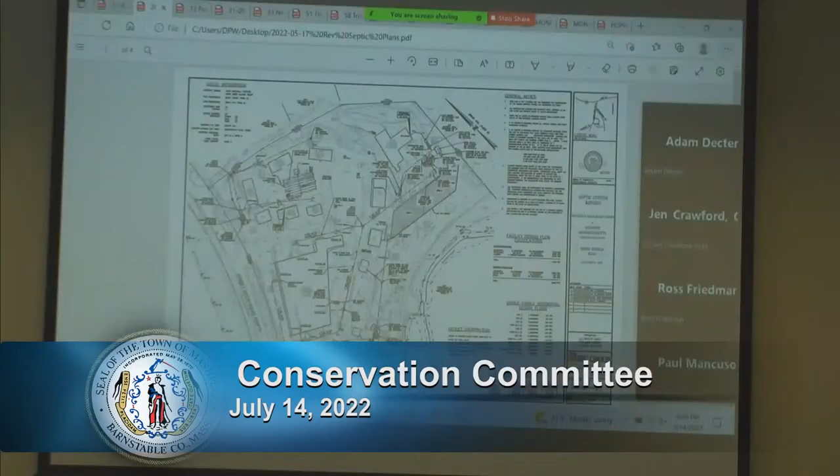The apartment complex is fairly old. The existing septic systems are starting to fail, and so as such we are proposing to improve the septic systems with some new IA systems that are nitrogen reducing, which will provide a betterment as far as what's leaving the systems and could reach nearby wetlands.

The wetlands on site include the Mashpee River behind the apartment complexes, with some BBW along the Mashpee River. Across the street, across Great Neck Road North, we have an abandoned bog system, which is flagged and shown on the left side of the screen.

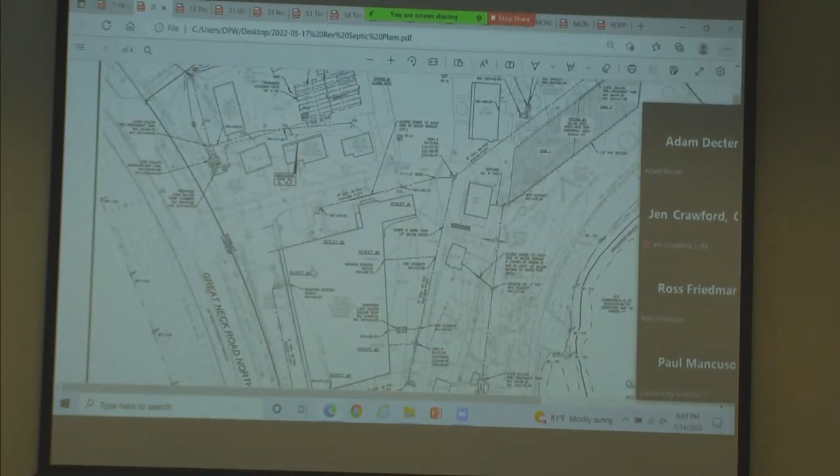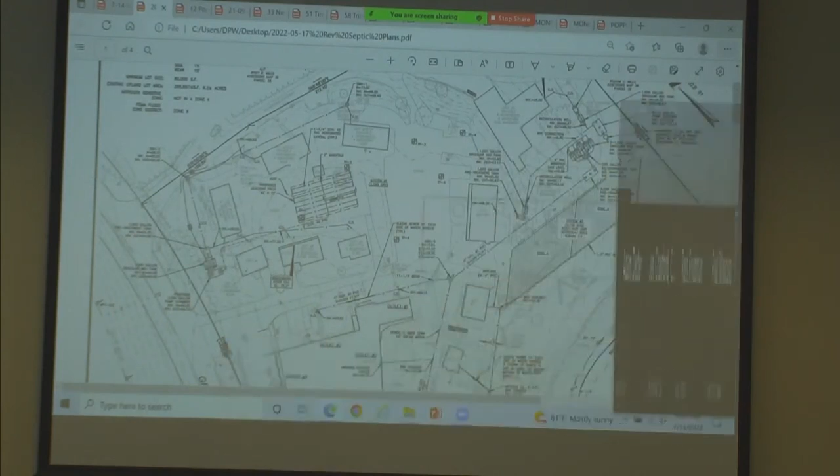They'll be abandoning the existing septic systems and installing new IA systems that are far more technologically advanced and nitrogen reducing, providing an overall betterment to the site since there will be less nitrogen leaving the system once these new systems are installed. So that's really all it is.

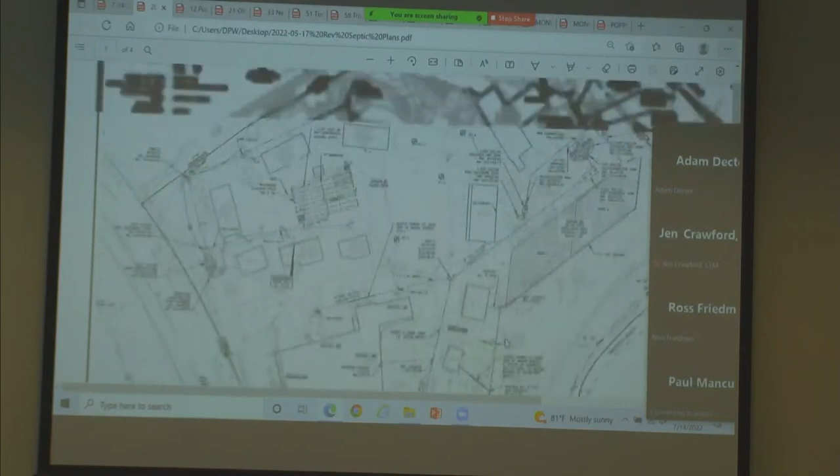There are a few different areas across the site where they will be installed. There were some constraints based on the existing structures regarding where these systems could be located, so we designed the project to have them as far from the resource areas as feasibly possible, since it's hard to fit these in with all the existing buildings on site.

One last comment: we have been approved by the Mashpee Board of Health for all the proposed septics, so we've already gone through their process and been approved. Now we're here proposing to you just to improve the existing septic systems on site, essentially. If anybody has any questions, myself or Todd McDonald would be happy to answer them.

Okay, thank you. I'm going to go to the commissioners first, if any of you have questions or comments, concerns for what you have before you. Why don't you take a couple of minutes to look that over.

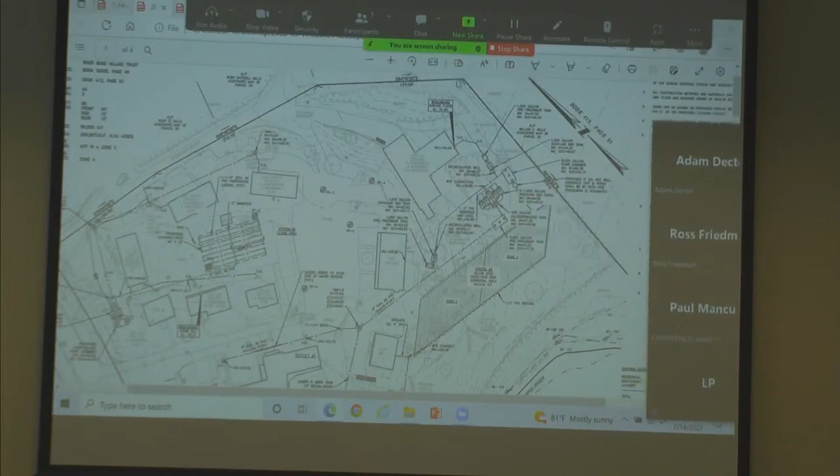I did hear that this is an IA system proposal. Is that correct? Yes, each of the three proposed systems are all IA systems. They are singular systems. Okay.

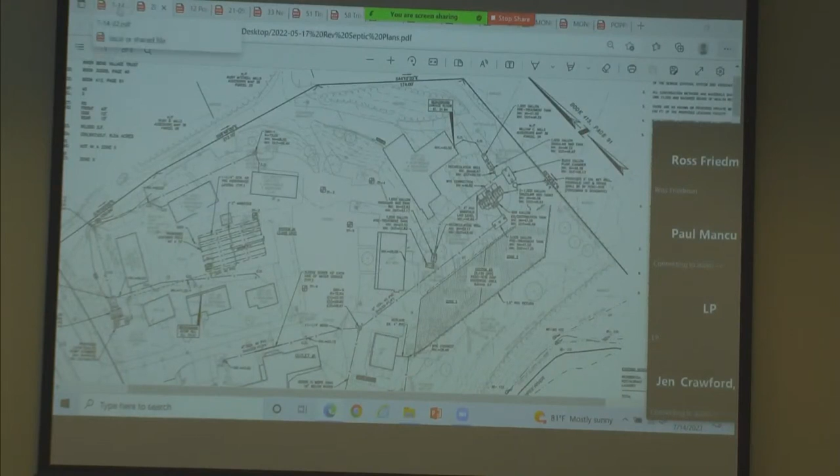And all of the cesspools are coming out, correct? Yes, all the existing cesspools are going to be removed in accordance with Title V. How many of those are there right now? There's a lot, because each of the individual cottages surrounding have their own systems. So there's a large number of systems on site, and we're compiling the whole site into 3 new proposed systems. I don't know the exact number of existing systems to be removed, but what I do know is each of the cottages have their own system.

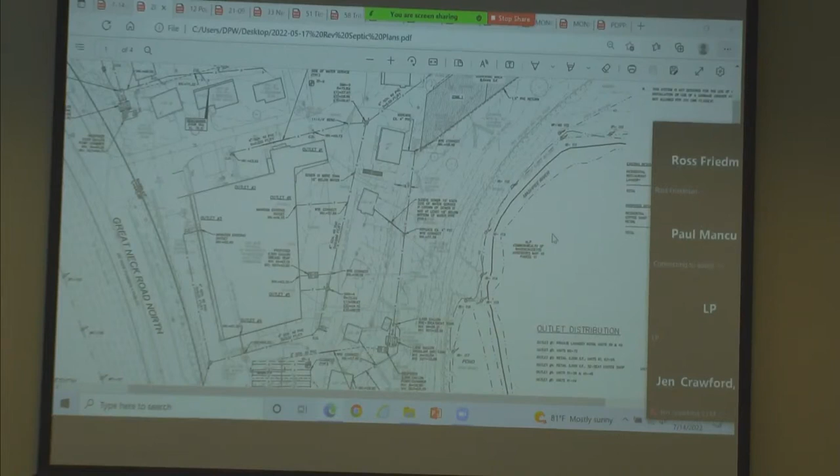Okay. Any other questions from the commissioners? Yes, Mr. Chairman. On the SAS on the south side of the property, what is the distance to the wetland across Great Neck Road North?

There's no dimension there to that wetland. And I'm seeing all the other systems are seemingly towards the center of the property, but this one's on the edge of the property and there's wetlands there. Do we have a figure for that distance?

Which system is that in reference to? System 2, the one highlighted on the screen? Yes. System 2 on the south side. Yeah, the 100-foot buffer to the inland bank runs right along the edge, so it's at 100 feet.

Do you see that? I see right along the property line... Oh okay, I see 100 foot. Okay, yeah, I see that now. Okay. A lot of information on this plan. There is a lot, yeah.

Mr. Chairman, did you mention how many— he said, when you asked a question about the septics, an unclear number, but how many cottages are there actually in the whole project that are to be undertaken? The number of units, how many units? He said there was one assigned to each unit, and I don't trust myself to count them. There's 10 cottage units, and then the one main building.

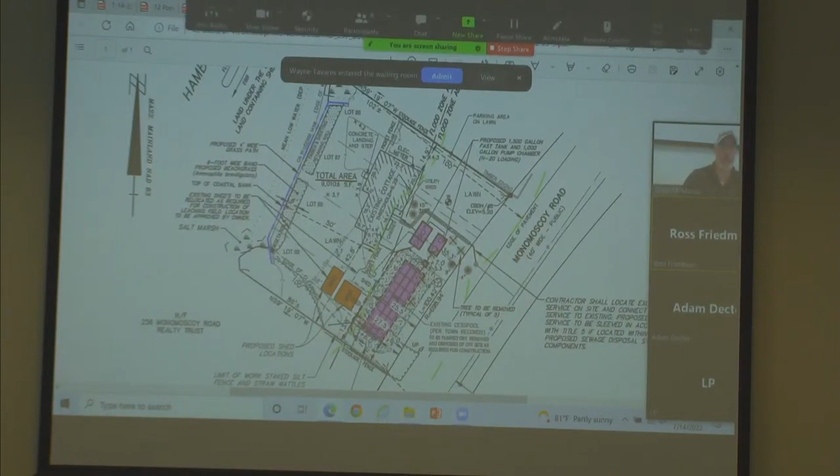This project will result in a substantial environmental benefit after it's completed. We believe the project meets all the applicable performance standards. It's already been approved by the Board of Health, with a condition that they want this installed as quickly as possible. I believe there's a 90-day requirement from the time you issue your order of conditions for a clock to start for the applicant to have the system installed. That's it in a nutshell. We're respectfully requesting you issue an order of conditions, and I'm happy to answer any questions. Thank you.

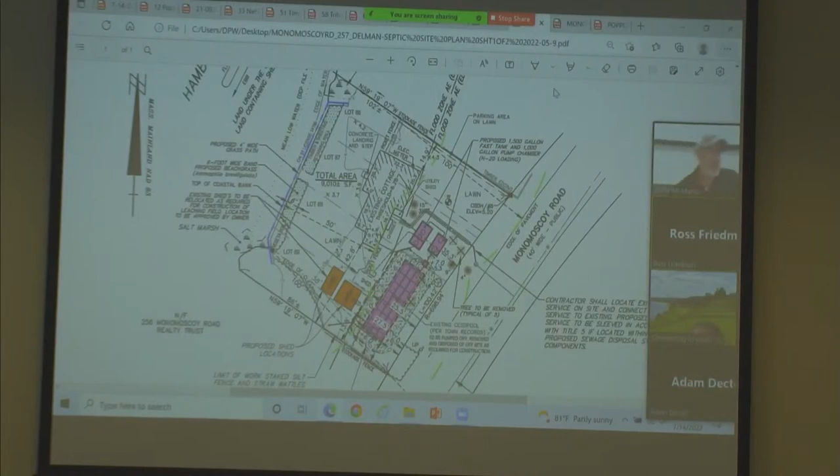I'll ask the commissioners first if there are any questions, comments, or concerns with the proposal. Mr. Chairman, one question - I see how the grade is going to be mounted up over the SAS there. I just wonder how that will slope down to the front property line, and is there any mitigation or landscaping at that location?

There's a minor increase in grades. We've got an existing 5.3, we're going up to 7. It's just going to be regraded. There's going to be a fence installed per requirement from the Board of Health to keep traffic off the system, but the front yard will be restored after the system's completed. Okay, so there's grass planted there? Yeah, there's no need for retaining walls - we're able to just grade this out. It's not high enough.

Anyone else? All set? All right. Marjorie, you okay? I'm good. You good? Okay, I reserve my rights, but I'm good.

Thank you. Drew, can we hear your comments on this? Not really much to add, just to reiterate the Board of Health comments - that the septic design plan is approved by Board of Health. The permit will be issued upon payment of the permit fee and submittal of 2 original stamped copies of the approved plan. Also, for the mitigation aspect, I'm recommending a condition of a 1-year monitoring and maintenance agreement, with submittal of a monitoring and maintenance agreement for 1 year. It's a relatively small amount of mitigation, so I don't think 3 years is necessary for this amount. No other comments.

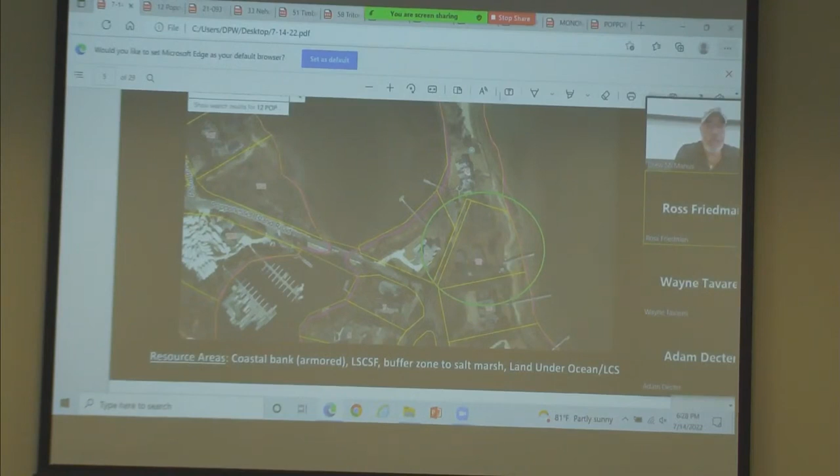Drew has the GIS pulled up once again. You can see we're at the tip of Popponesset Island Road, just after you cross the bridge. I'm going to highlight on the screen where the boathouse is. So there it is, colored brown, once we flip to the plan.

This is an existing structure. It has existed for quite some time and has a solid foundation. What we're proposing is essentially to rebuild the walls and put a new awning type of roof structure over the top of it.

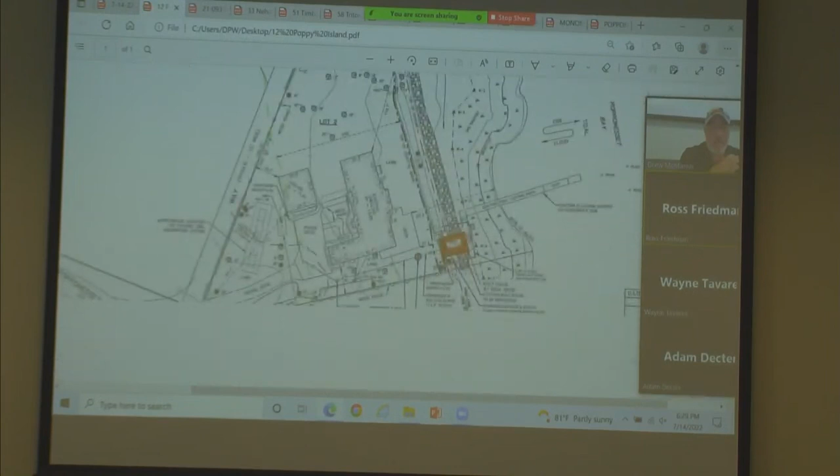We are going to connect, there is a bathroom in there now, and we're going to connect that to the existing septic system by way of connecting...

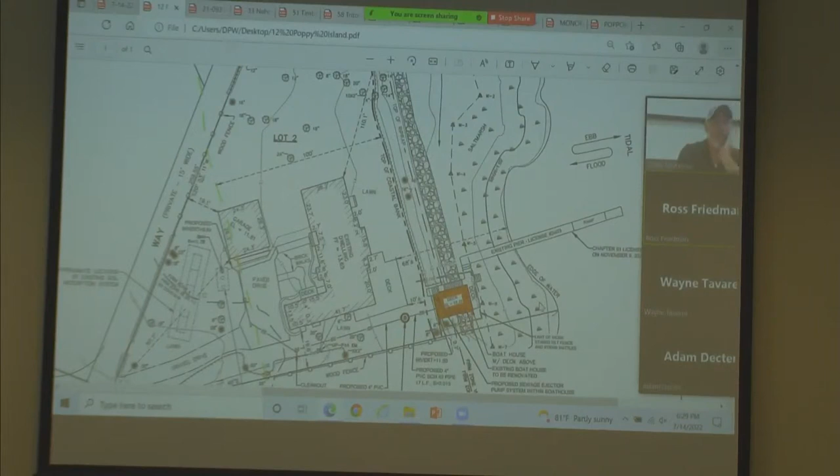We're going to flow out to a pump chamber and then pump that up to the existing system. It's rebuilding in the same footprint with no modifications to the foundation. There's no impact to the resource areas other than the temporary activities for construction. We do believe the project meets all applicable performance standards, and we are respectfully requesting you issue an order of conditions. I'm happy to answer any questions.

Okay, thank you. I'll go first to the commissioners for questions, comments that you have on this proposal.

Mr. Chairman, one question for the applicant: when you're talking about rebuild, looking at the photographs, it looks like a 7-foot high concrete wall that's there now, correct? Yes.

So when you say rebuild - the interior portions, new windows, and then there'll be a cabana-style roof on top of it. So the existing foundation's going to remain? Right. The foundation is actually in good shape, they pinned it into boulders that are there. So yes, the wood framing and the...

Drew's got a great picture right there. There'll be new windows and doors, new siding, and then think of it as a cabana, with an open-aired roof covering on top of it. I was just more concerned about the foundation. No, surprisingly, the foundation was in very good shape. Okay, thank you.

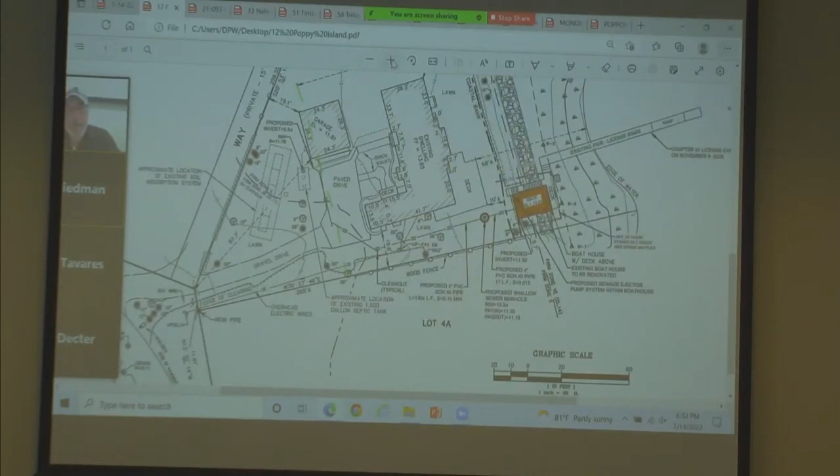We're probably looking at about 100, my guess would be about 120-foot long trench. See the line type with the double S's on it? Right here. That's where we're going, right over to here. So this line's about 265 there, so I'd say we're probably 150, maybe more, to get around the house. But this is very minor trenching - we don't need to remove any trees or anything like that.

Is it a single-day operation or two? Depends on who you get to do it, I think. We haven't had a lot of heavy rains anyway, so it's probably not a concern. We are going to, just to note, put in a limit of work around here just to keep people in bounds, so to speak.

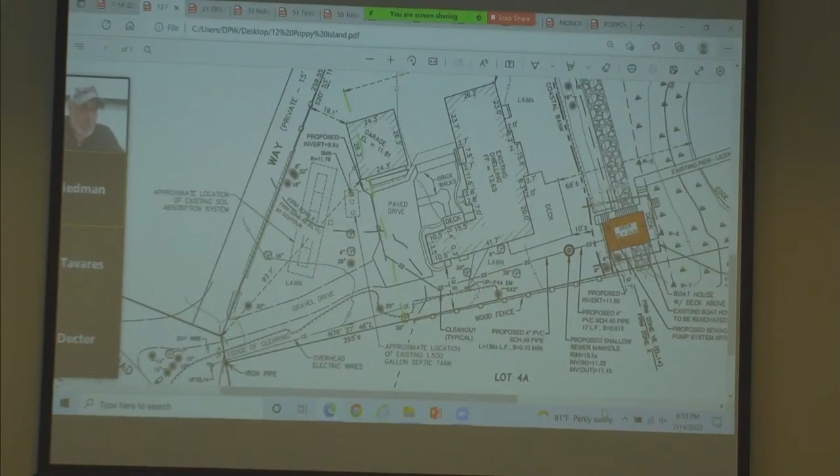Anyone else? Questions? No? Any questions from the public? Hearing none. Drew, comments on this proposal?

Board of Health comments: septic design plans to be reviewed by Board of Health at their July 16th hearing. Not much more to add - this meets the performance standards for a coastal bank.

It is an armored, revetted coastal bank. There's no alterations outside the existing building footprint, which you can see in the images here on the screen. With the exception of the trenching for the proposed sewage ejector pipe to connect into the existing septic system, there's no foundation work, therefore no impacts to the coastal bank, salt marsh, BVW, or land under ocean. So I'd recommend to close and issue with typical boilerplate conditions.

Okay, thank you. Is there a motion to close and issue an order of conditions for this project?

Mr. Chairman, I'll make a motion that we close the hearing for Popponesset Island Road LLC, 12 Popponesset Island Road, and issue an order of conditions based on the agent's recommendations for the boilerplate conditions.

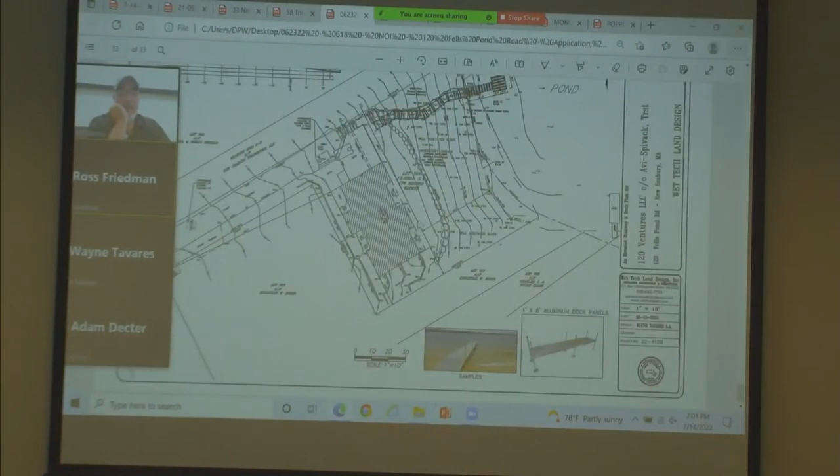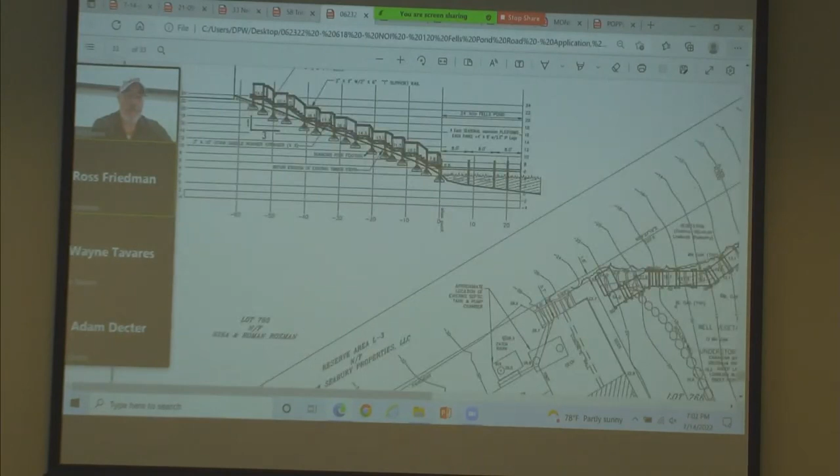Okay, yeah, thank you. You want to take it into the pond, move it over a little bit. A little bit more. There we go. Oh, a little more. There we go. Thank you.

Oh, this is the original plan, Joe. This is not the revision that I had sent in. I apologize, Wayne. The commissioners have the revised plan in front of them. Okay, you can proceed. Well, let me go with that then.

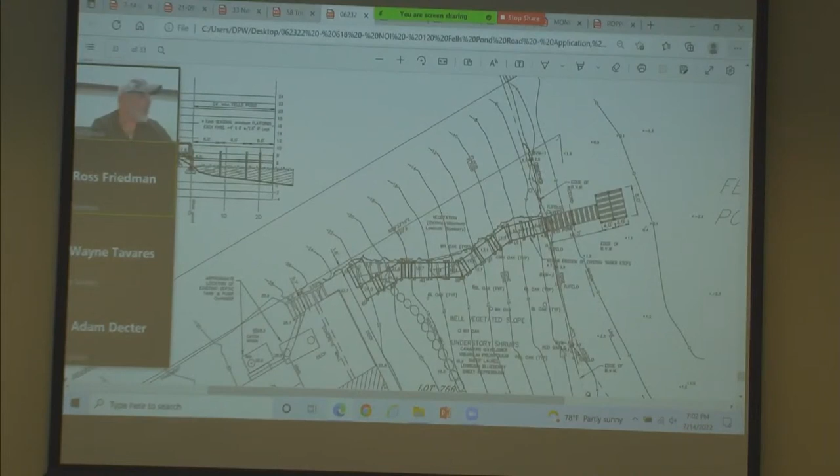It'll be a little bit confusing, but it's pretty simple. One of the abutters mentioned that putting the dock into Fells Pond at 24 feet was a little much. So we restudied the situation. We wanted to have 2.5 to 3 feet clear, as most towns require, including yourselves, for any boat traffic to the bottom of the pond, for obvious reasons.

So we took 4 feet off the dock. We have 4.2 feet elevation for the pond, and at that point 1.1 feet, so we're going a little bit on judgment and a little bit on luck, because there are spot elevations when they do bathymetrics. So we seem to have 3 feet at a distance of 20 feet. It should be noted, adjacent docks are 24 feet long to the south, and another one approximately 12 to 14 feet in the pond, so we're sort of in the middle at 20 feet, and that we have noted on the revised plan.

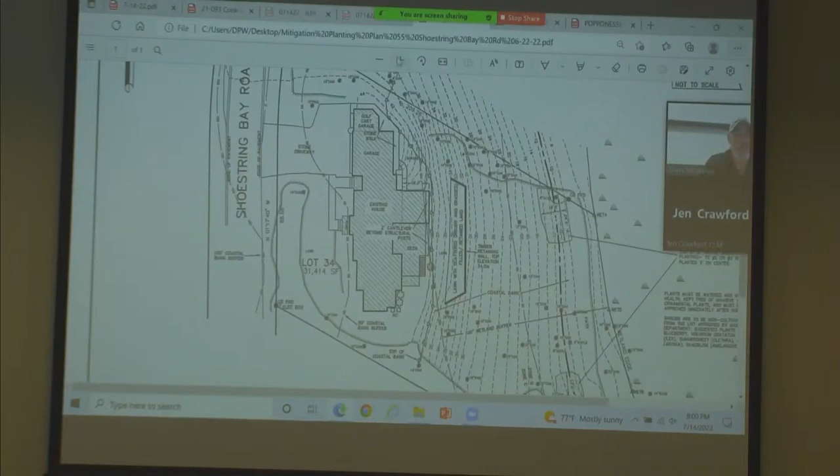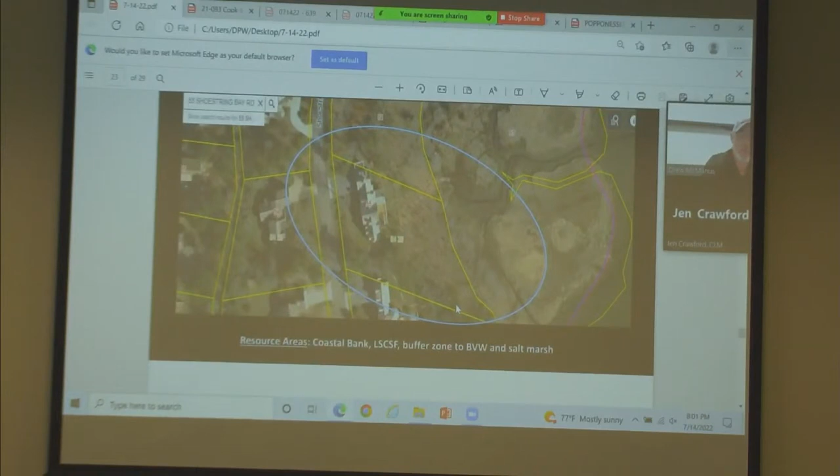Several years ago, we did a NOI to expand the decks on the water side of the property, and recently did a compliance plan, did a survey for compliance, and found that there had been a non-approved retaining wall built. So at this property, it fronts on Shoestring Bay. There's a salt marsh along the bottom of the slope, and the slope is flood zone elevation AE, flood zone AE elevation 11, reaches the top of the bank, and the bank in general is more than a 4-to-1 slope, and so this is a case where the coastal bank runs all the way up the slope, basically all the way up to the house.

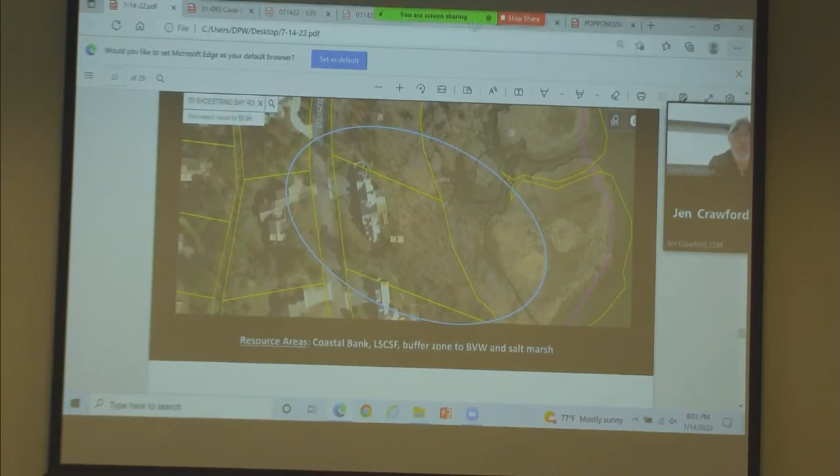There's a flat area up toward the house. So if you have the plan there, there's a... sorry, I'll bring it back up here. This is one of the annoying features about Zoom. This is drop down menu and trying to bring up PDFs. You have to wait for it to go away. Which sometimes it does.

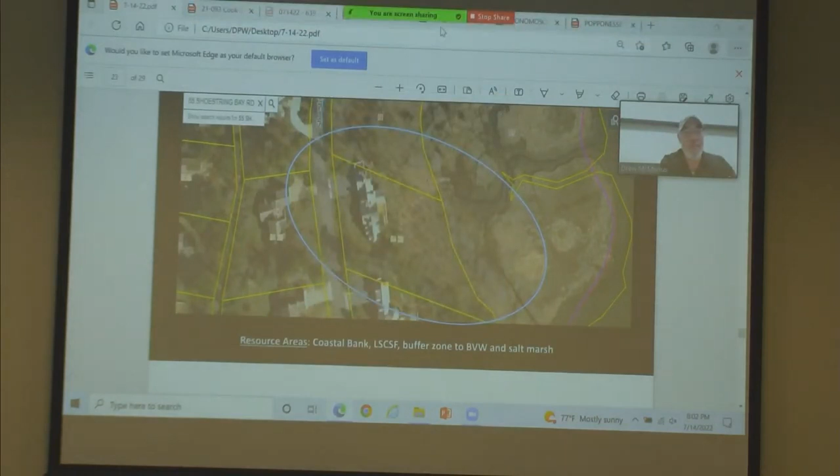So on this plan here, up toward the top of the hill, just behind the house, there is that area there, and there's been a timber retaining wall built, which is a 3-sided retaining wall. It's a total of 80 feet long, and that bank is steep, and it just made a semi-flat area, I think, where people could walk out. It's not actually considered coverage. The topography there changed, so it was an alteration of the landform in that location, but it was planted with grass. There were some shrubs and some other flowers in there, and the timber retaining wall itself is only about 37 square feet of coverage.

The change in topography in the confines of the wall was about 630 square feet. And so when, about more than a month ago, when compliance was issued for this, there was a condition that we come back with a plan to propose mitigation planting for this change in the landform. And so down toward the bottom of the bank, we have 2 areas of mitigation planting, which is a total of 750 square feet of native shrubs.

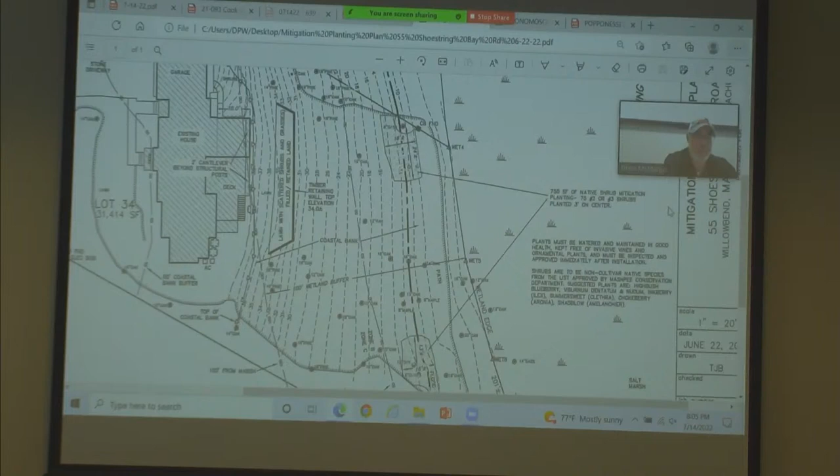That's the proposal. I'll take any questions about it. Okay, thank you. Questions from the commissioners? Concerns? No.

Hearing none? Yeah. I'll make a motion to... Oh sorry, I did have one. Drew's comments before, sorry Drew, cut you off.

No problem. As Tom described, this is just an after-the-fact mitigation to deal with a landscaping and hardscaping feature that was put in without a permit. I recommended a notice of intent because I believe it would be a type of project reviewed by the commission and qualify for required mitigation. So this is just after the fact to bring that into compliance.

The coastal bank is vegetated, mostly comprised of turf grasses, some turf lawn, and then more heavily vegetated areas as you progress down the bank, leading to bordering vegetated wetland, salt marsh, and eventually Shoestring Bay. So it's a non-eroding coastal bank. It does not perform as a sediment source for adjacent beaches or dunes. This is all salt marsh, land under ocean in this general area. So it provides a function of vertical buffer to storm damage and will be enhanced with the mitigation plantings.

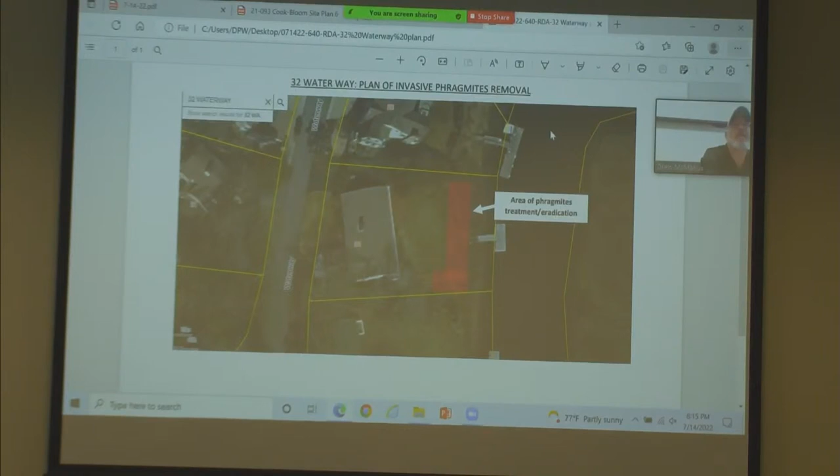I'm just curious, who is the company coming in to actually do the elimination of the Phragmites? The individuals who will be doing that are a company called Bush Landscape. They're very familiar with these Phragmites and how to remove them so that they are as kindly removed as possible.

Yeah, but to have them stop spreading everywhere. So I'm guessing, Drew, at some point you're going to tell us the chemical impact and that this is safe and all of that. Yes. Okay, any other questions?